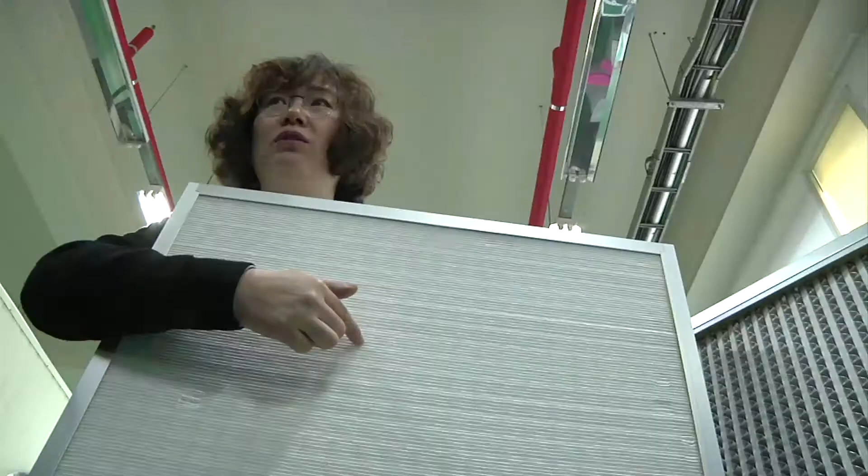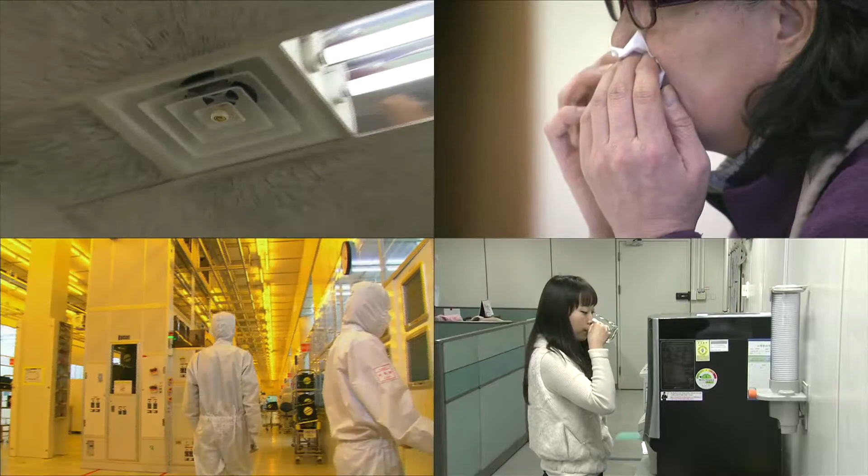This air purification company has developed a new air filter. These air filters use high-performance microfibers to help filter out fine dust particles from the air. Among particle pollution, there are inhalable particles which can penetrate deep inside the human lungs. Right now, we're developing a filter that can filter out those particles completely. It's a filter for central air systems for clean rooms, theaters, hospitals, and food factories. Essentially, it would only allow clean air to flow indoors.

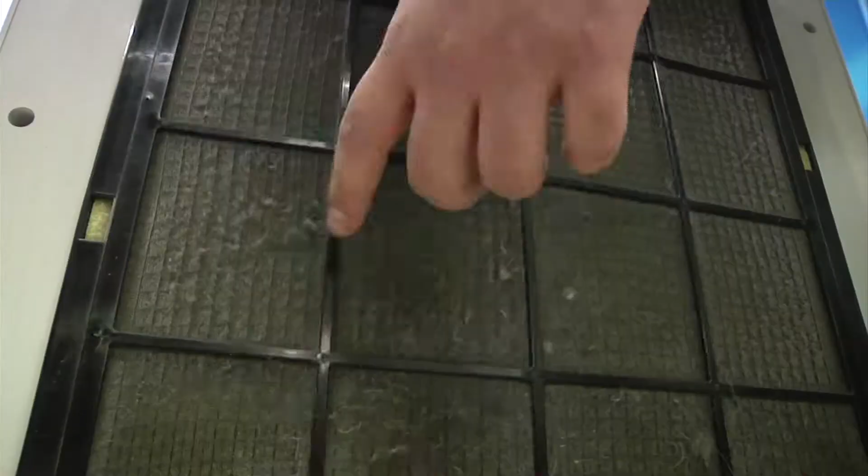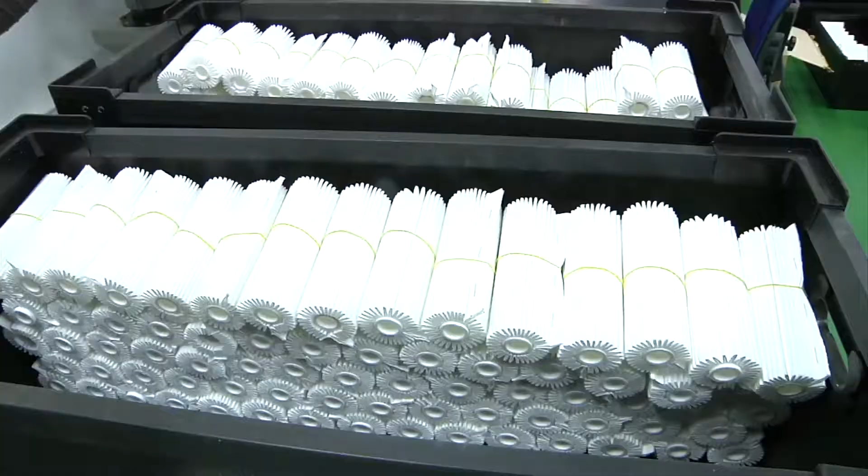This paper filter, composed of high-tech microfibers, is currently being used to filter the finest unwanted particles in water filtration systems and other industrial machinery. It will be installed in ventilation openings throughout public facilities with a lot of foot traffic in the near future. The installation will filter the incoming air before it enters the building, leading to a much more hygienic, dust-free environment. To protect people, this filter will also be made for home healthcare appliances. Right now, it's being exported to countries such as Brazil, the US, and China. We also hope to continue expanding exports to more countries and provide clean air to everyone in the world.

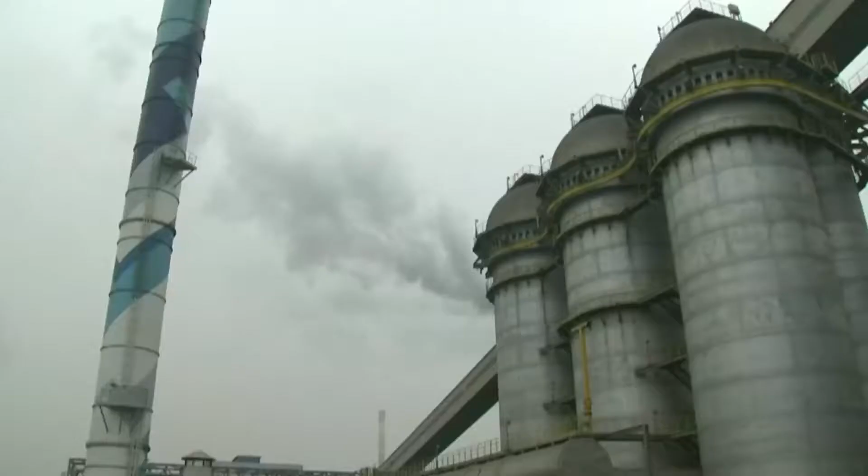Usually, fine dust pollution is caused by burning fossil fuels like coal and oil, or through smoke and exhaust fumes from manufacturing facilities and automobiles. Industrial dust particles have especially harmful effects because of the metals, soil and dust particles, as well as acids and other organic chemicals. So it's most effective to filter this dust at industrial sites before it is emitted.

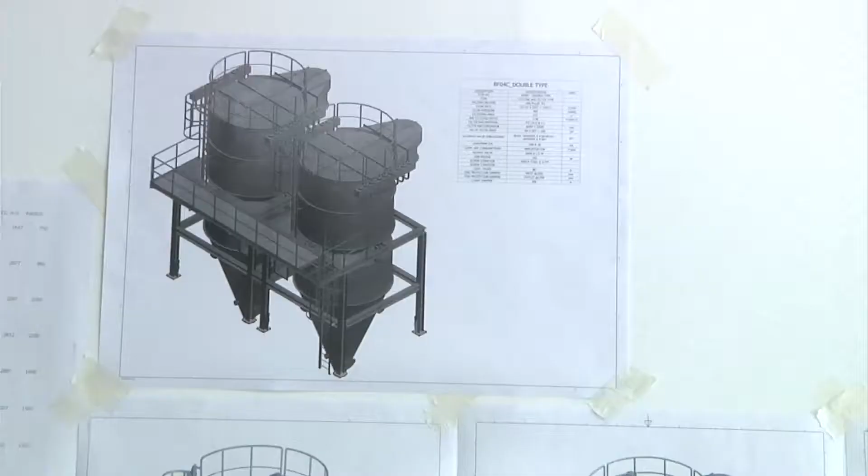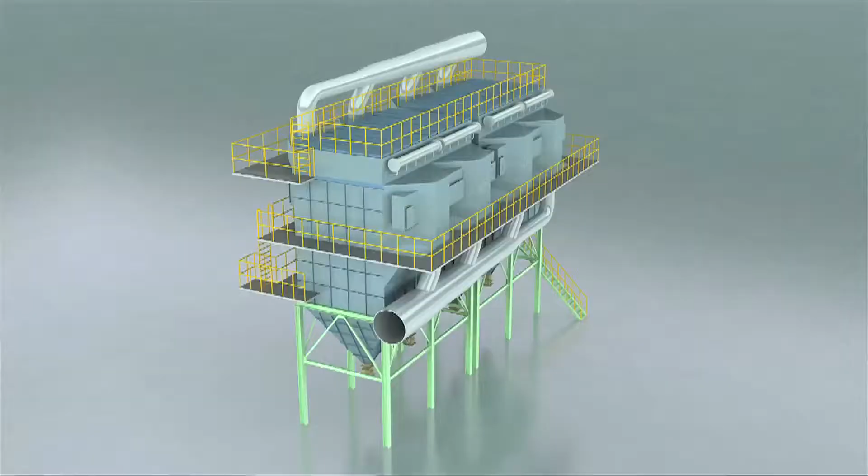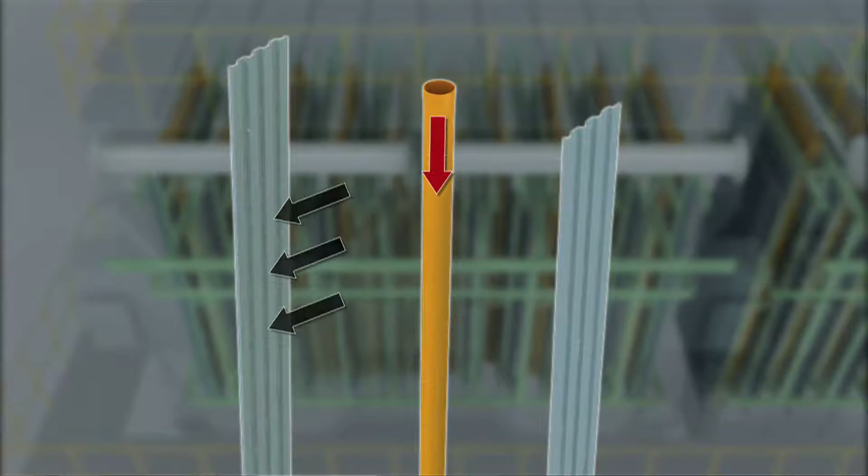Here, they developed a product that installs to the thermal power plants, which helps collect industrial dust. It's the only electric filter and dust collector of its kind that has been commercialized in Korea. Previous electric dust filters and collection systems were not enough to manage all the dust produced by power plants. This system is able to do all that and improve people's quality of life by preventing industrial dust emission. This new technology is able to collect 99% of all fine particles that are causing a lot of problems these days.

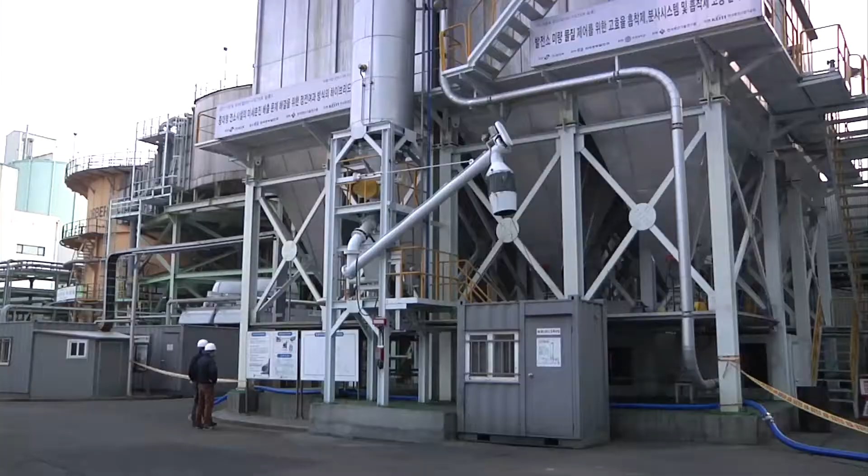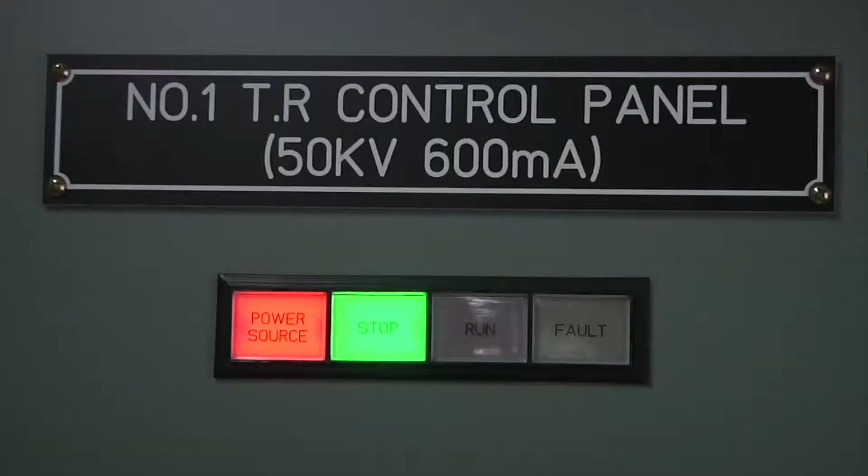This thermal power plant produces 400,000 kilowatts of power every hour and 2.4 billion kilowatts each year. Like its enormous size and production, it produces a large amount of dust. The electric dust filter and collection system installed here is able to catch fine dust particles that are 1/4 the size of ordinary coarse dust particles.

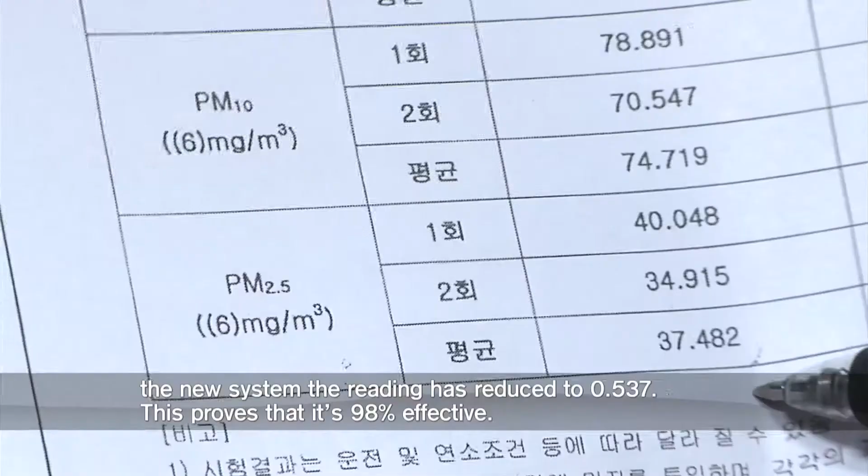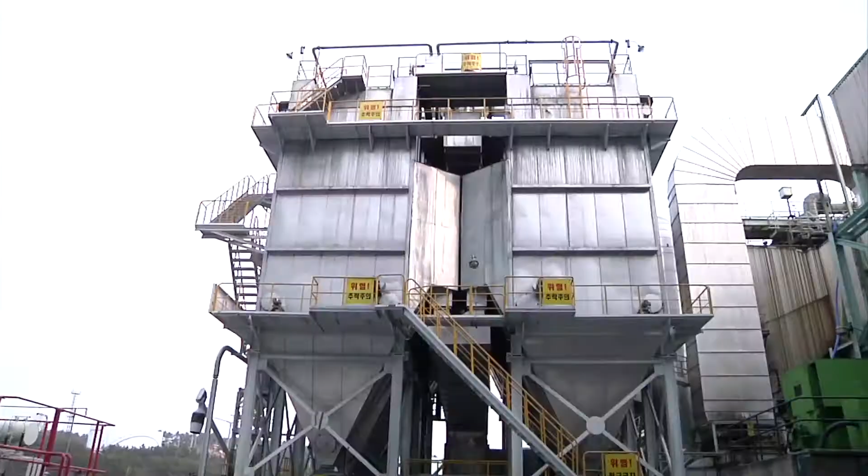After installing the new system, it was able to eliminate 98% of fine particulate matter from being emitted into the atmosphere.

The electric dust filter and collection system installed here is made to collect industrial dust produced at large industrial plants, such as coal thermal power plants, cement factories, and incinerators. In the future, we hope to export globally.

The companies that develop technologies of filtering the fine dust receive funding from the government. The Ministry of Environment and the Korea Environmental Industry and Technology Institute have been supporting environment-related companies in Korea with the Green Export Project since 2011. Each year, companies that participate in the Green Export Project find success in the global market. Exports have tripled during the past 3 years from $36.9 million US to $84.7 million US.

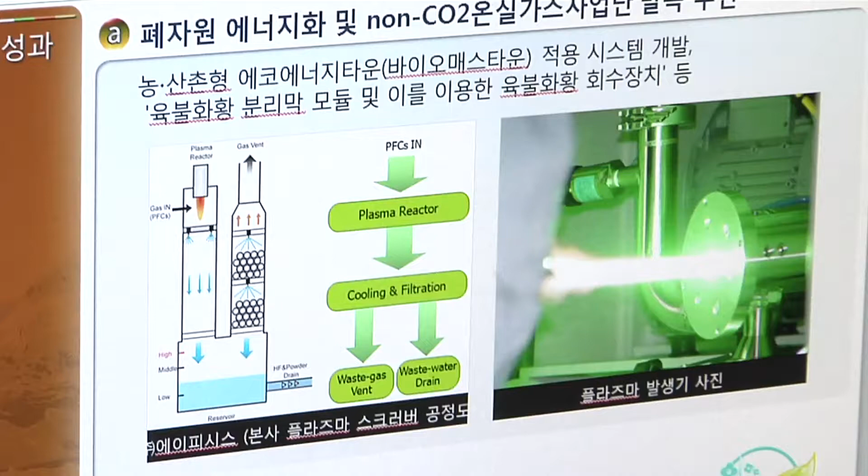We are focused on pushing next-generation eco-innovation projects by developing the world's best technology to realize environmental welfare. The Korean government plans to invest $1.4 billion over the span of 2011 to 2020, and they will fund special environmental technologies with high public interest, such as climate change, environmental health, and issues with underground water. As a country with leading technology, we're currently seeing many advances. There are over 20 environmental companies developing technology in Korea that currently receive government funding.

This type of technology will continue to advance in order to find solutions to the ongoing problem of fine dust pollution in the air.